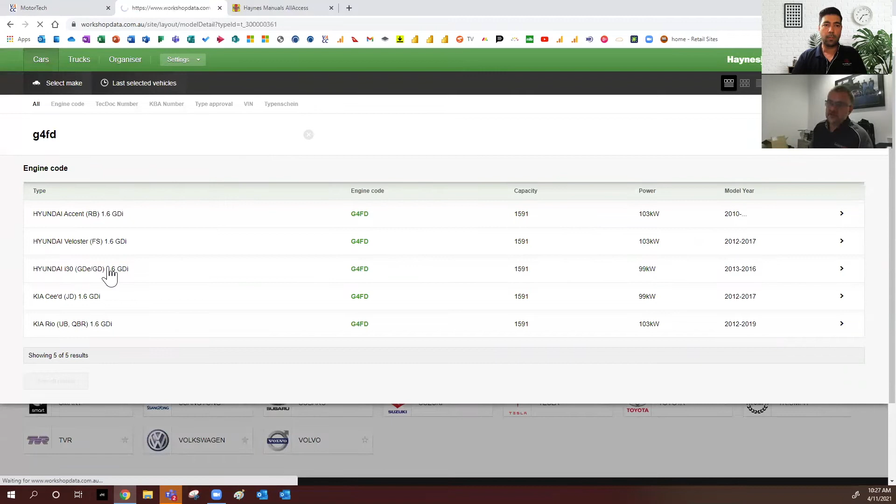I'm just going to pick on this car because this is my daughter's car. So if anything ever goes wrong with that, I know where to come now.

So this is a home page for all vehicles. Okay, so we can go straight into our service schedules or repair times, most common things, the fault codes. I'm going to come back to this. And then SmartPACK, as you were asking earlier, TSBs, recalls and cases—they're industry verified common faults.

So these are known. Haynes Pro has investigated them and verified them as well. Okay, so we can come into these. So as an example, we click here on the left-hand side, maintenance.

Let's just say, Peter, this is the very first time you're seeing an i30 come into your workshop, and you're about to do a service or repair, and you want to know what are some of the things I need to be aware of. So I can come in here and click on maintenance procedures.

I'm going to disconnect the battery or replace it, so I want to know what all my relearns are, or what precautions I need to take when disconnecting it and then reconnecting it.

Now, if it was a VW or an Audi with a steering angle sensor, it'd have that in there as well, where we'd have to just drive the car a hundred-odd meters dead straight, and it recalibrates itself.

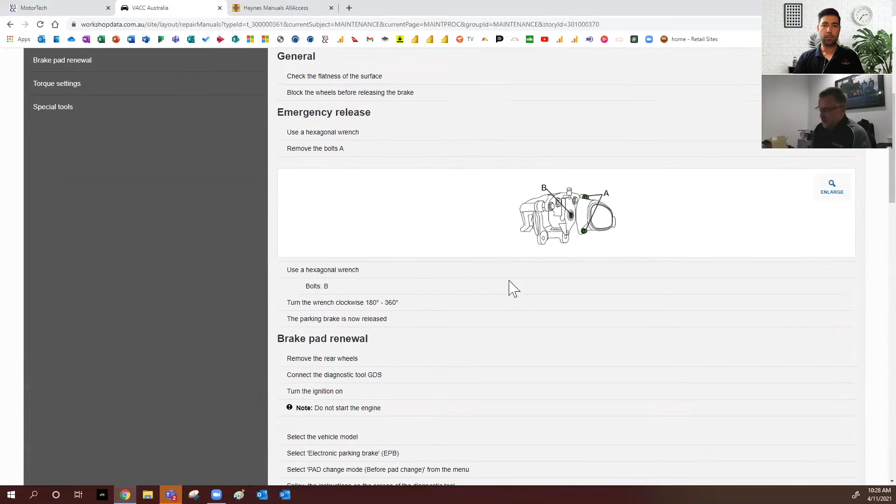Or it might have an electric handbrake emergency release, or how do I actually wind the pistons back in to do a pad change. Once again, all these diagrams expand, so it makes it nice and easy.

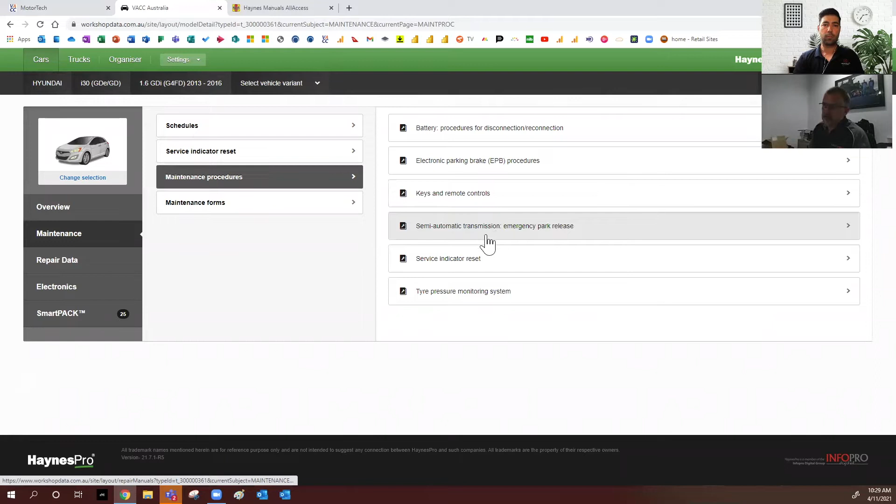So we might have then, depending on the vehicle, this list could have 10, 15 different things on there. It might be keys and remotes, or if it's stuck in park, service indicator resets, tyre pressure monitoring.

If it was a Mercedes that didn't have a dipstick, it'd tell you how to use the steering control to check your fluid levels. If it's a hybrid or stop-start, how to disconnect and reconnect those systems as well.

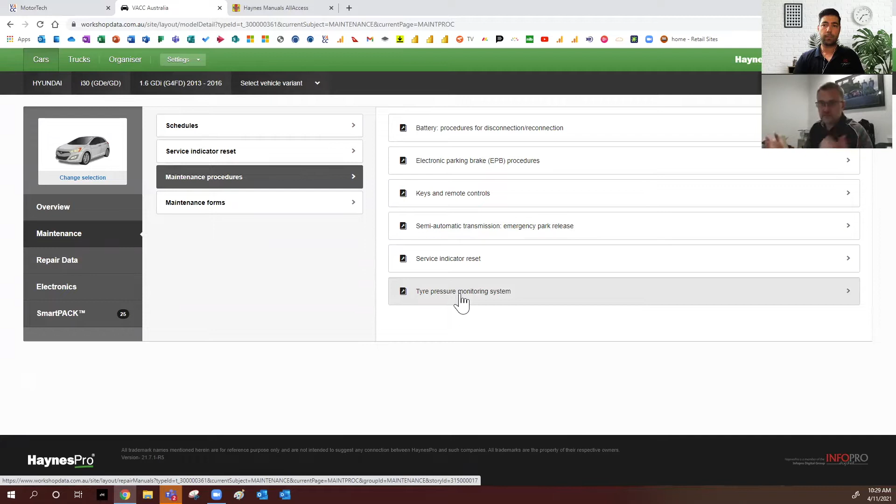If it had airbag suspension like a Disco or a Range Rover, how to disable those systems as well—so if you had it up on a two-post and you inadvertently hit the ignition, it wouldn't blow the bags up, that sort of thing. So once again, really good information in there.

Service schedules—service item intervals is just a real quick summary of when those consumables are due. So nice, easy reference: if your customer's on the phone saying my spark plugs are due, you can quickly look in here without having to go through all the different service schedules and say, no, they're not due at 120 or whatever it's due.

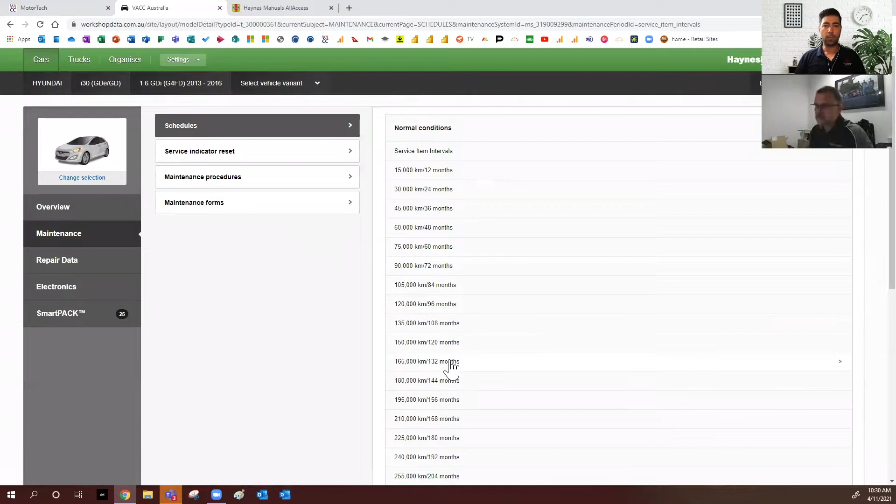But as an example, let's have a look at the 105,000 service. What it does is give me a standard time. Now, these standard times are based off OE times. Now, can we alter those times? Is there a variation so we can add a percentage to those times?

Yeah. I mean, we all know, and this has been a topic of discussion on the Garage Network, that sometimes they can be quite generous and other times quite skinny, and you might have an hour job that very well takes 2 or 3 hours, whatever the case may be, but you can adjust it.

Alter that in percentage wise. Fantastic. And this, as we get into it, it'll show you there's a couple of different ways we can do that.

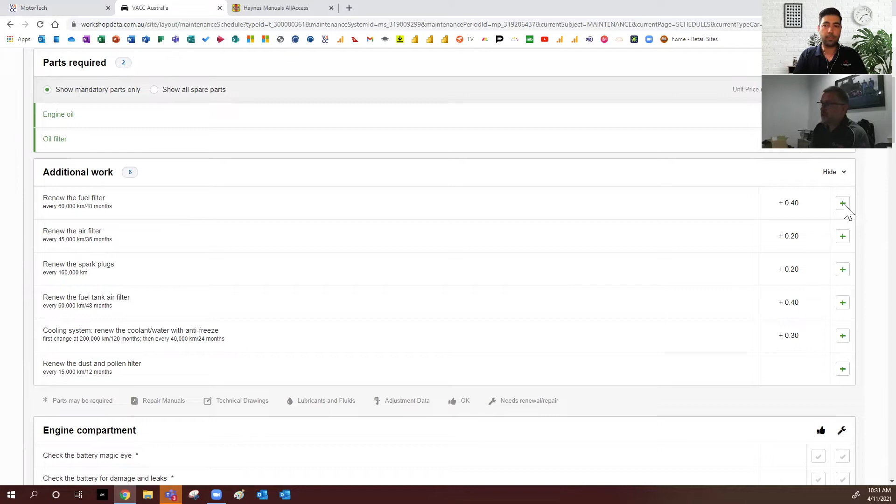So in here, what it does is at this point, parts required - so it's just oil filter at this point. But I've got a list of activities here that I might do because I look at the condition of the vehicle and say I need to go and do the fuel filter. So I can add that on, and it'll add the fuel filter into that list. If I scroll back up, it's now added that extra time and totaled it up.

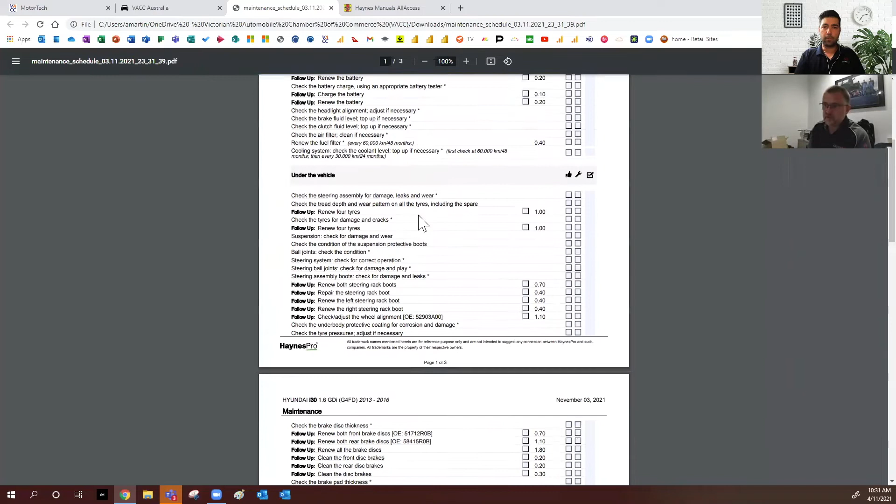So at this point here, just as an example, I can then click on print - I can do it as a job card or also as a customer quote if I wanted to. If I've got all the details in here and I hit print, what it does is it'll generate a PDF, whether I'm printing it or emailing it or whatever I need to do. So it's got that as well. Yeah, right, that's interesting.

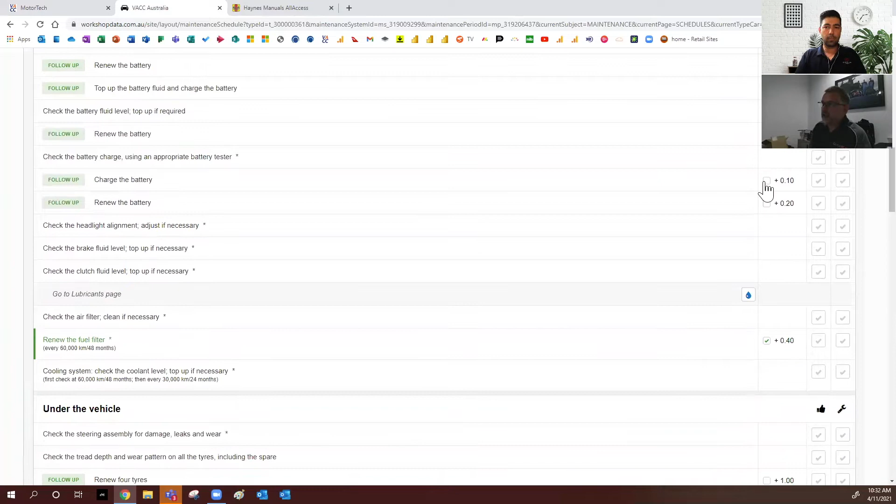Now then, as we keep going through the service, all the things we need to do - so from engine down, it's now got all of the service items that we need to do. We're clicking through, checking everything we've got to do, and we can click off here. But as an example, I can then go and add any of these items as well.

Click through - now, as you see, there's multiple little icons on the right-hand side. So if we clicked on that, it'll take us through the lubricants and fluids page. Depending on what transmission we have, it'll tell us what transmission fluid it is, our capacities, our drain and fill locations on there as well.

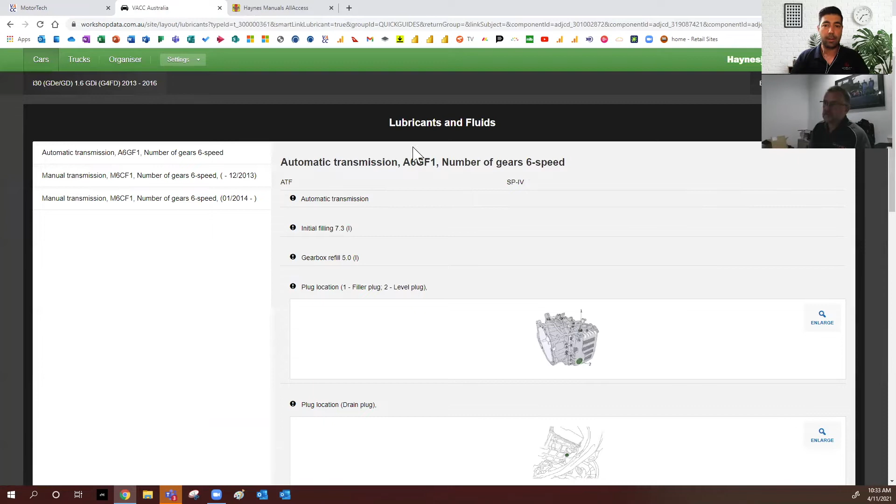Right, can we just go through that again, Andre, because I find that really interesting. So you've got the information at the ready - if I'm doing a drain and refill or a transmission service, because it's specified on that, I can simply click and it will show me the procedure for it. It'll give us the specs of the fluid there.

Fill and drain locations - it will then also give us, just in another section, the actual procedure, whether it's just a level check or we're actually doing a drain and refill there as well.

And then as we continue going through the service, whatever it may be, you'll also see here it'll say follow up - things to prompt us to go and have a look at. We might have been looking at the boots on the CV joint or whatever it is, but it might say follow up and replace them. So we can then click on that and add it, and it'll add it to our job card.

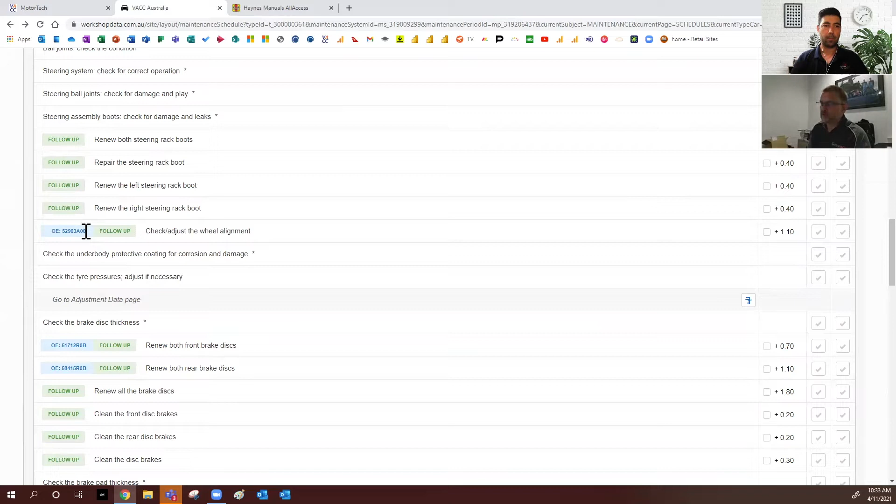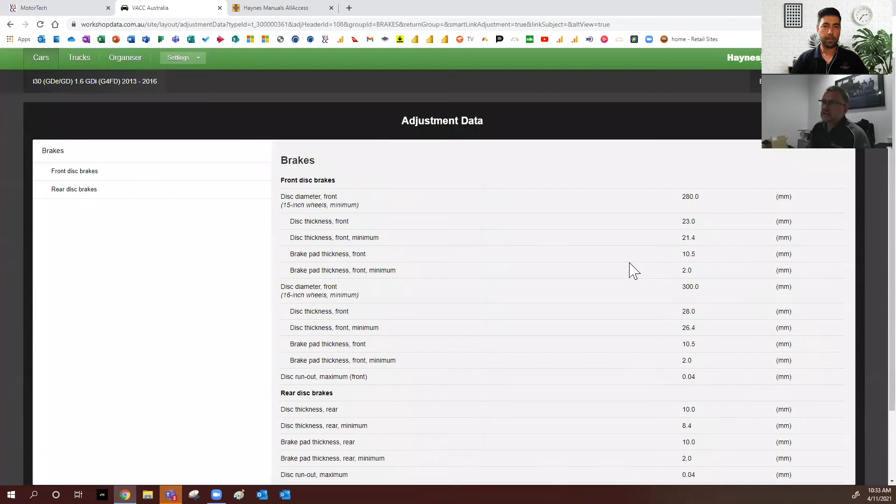So once again, we've got the icon of the verniers here. We click on that, it'll take us through to the adjustment data page of our various rim sizes, and give us our disc and rotor and pad thicknesses, or drum and linings and all that in there as well. It's nice and easy to navigate through when we're looking for that information.

Yeah, absolutely. And as we keep going through the service, we might be engine oils - click on that, link through to there. If there was pollen filters and or service resets, it'd have it in here as well. And it gives you fuel capacity. Just really quite simply there, straight up, that's good. And also then our sump plug torque in there as well, and same with the filter - a whole range of information that we'll need.

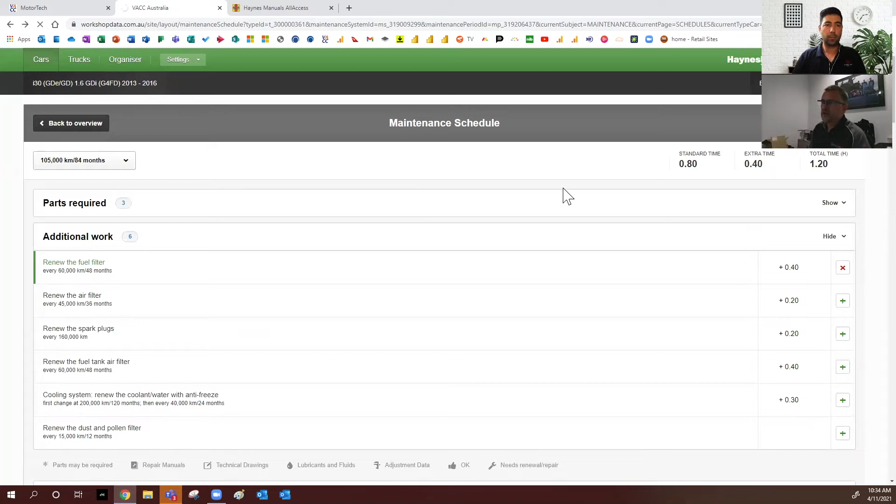And then obviously, as I said, it'll have the service indicator reset and the procedure there, step by step to do that.

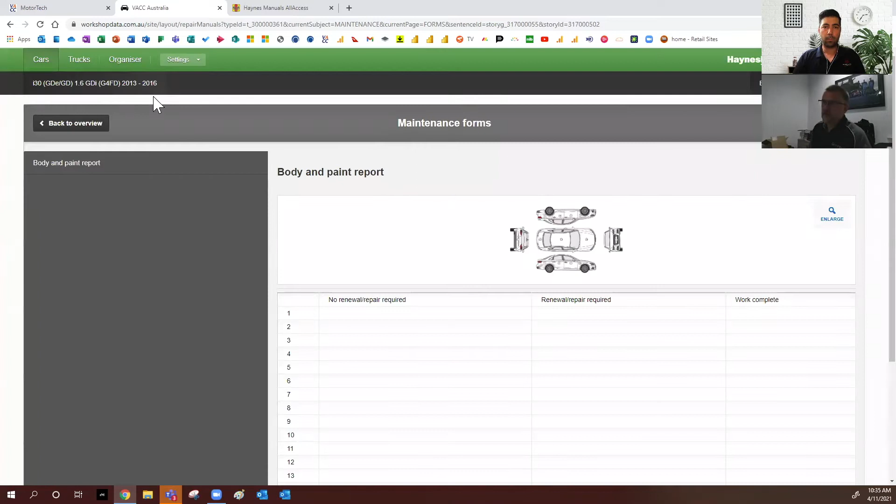Maintenance forms. We might be doing a vehicle inspection, and we just need to mark out any damages on the vehicle in there, or we might have other reports that we need to go and do as well. Nice and handy information.

When we get into repair data, this is the more mechanical aspect of things. We've got some filters, so if we just wanted to see engine, transmission, or steering and suspension info, we can click on that and it'll filter it down.

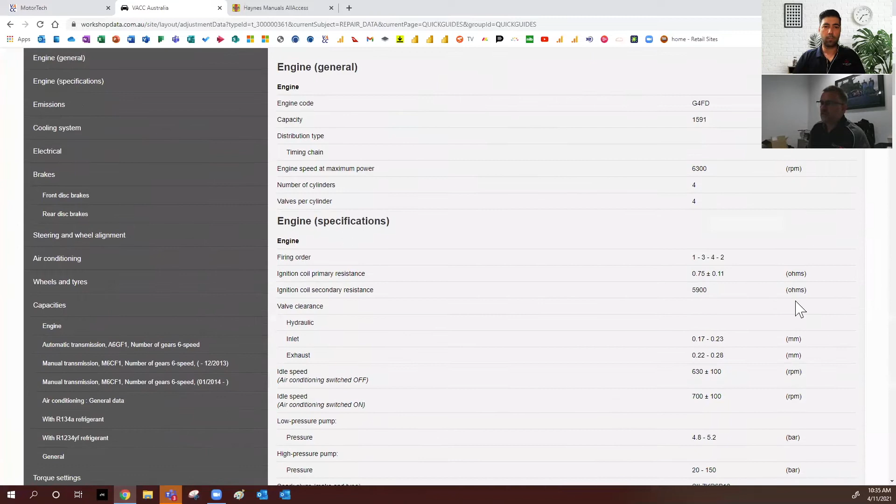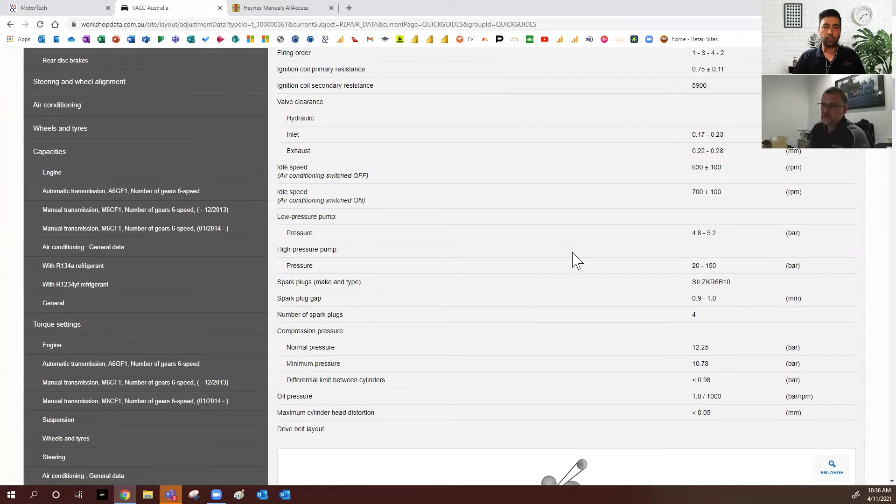Our adjustment data and lubricants and fluids is all that lube and tune based tech data we have. Depending on the vehicle, it might have things like our firing orders, our coil resistances, valve clearances if they're adjustable, fuel pressures, engine compressions, oil pressures, our drive belt layouts, and if there were multiple ones in there.

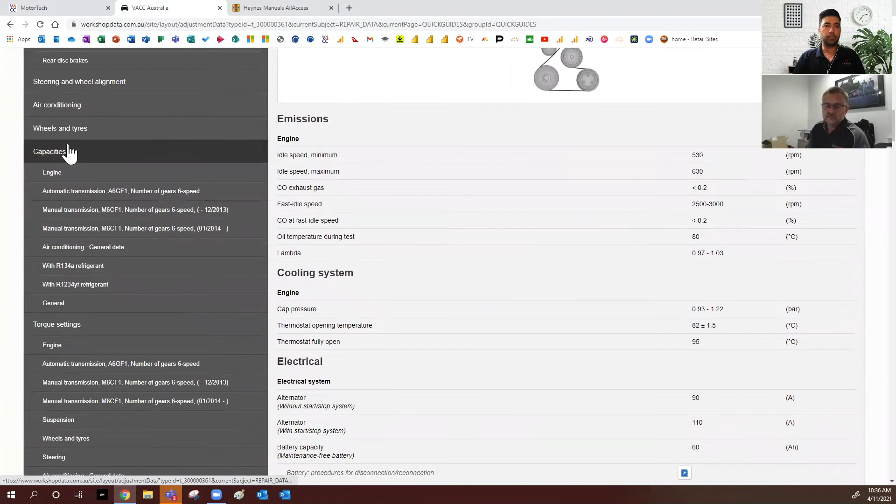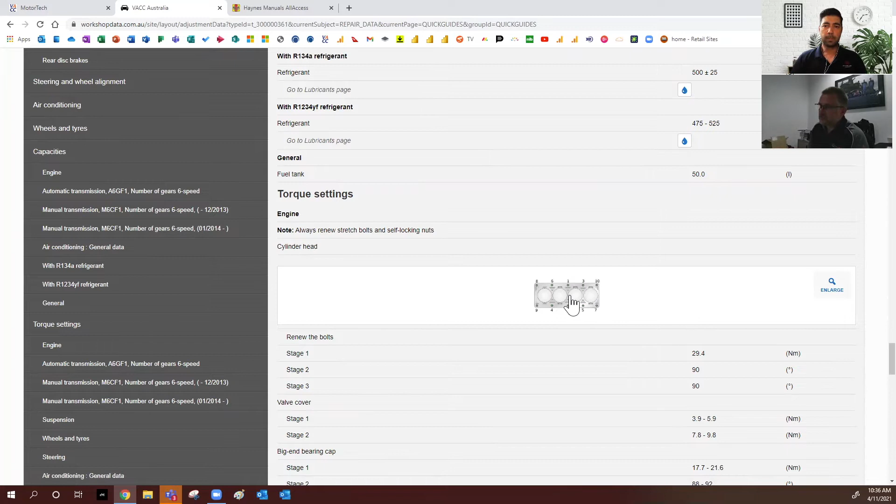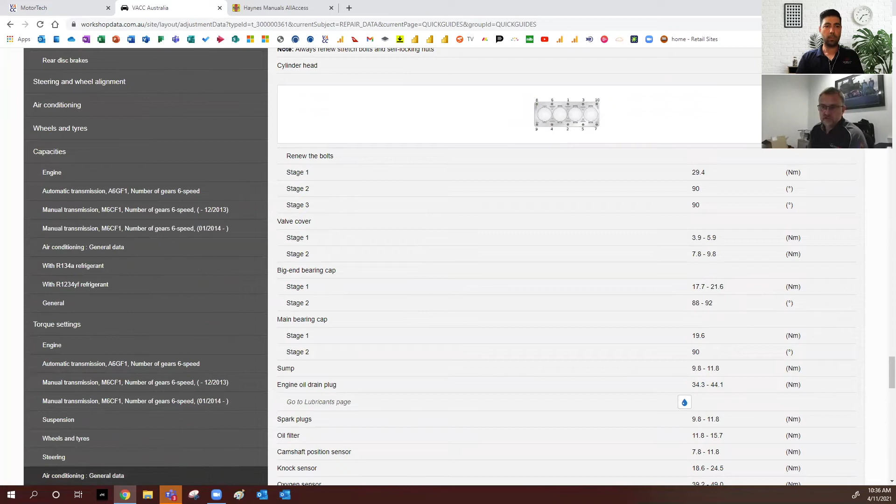As we continue down on the left-hand side, depending if the car's got air conditioning and what system it's got, it'll give us our gas capacities and also our oil types, with links taking us through to that particular page. Our torque settings throughout the engine, and our sequences, if there was a bottom end sequence, it'd have it in there as well. Sometimes general information about different systems in the vehicle too.

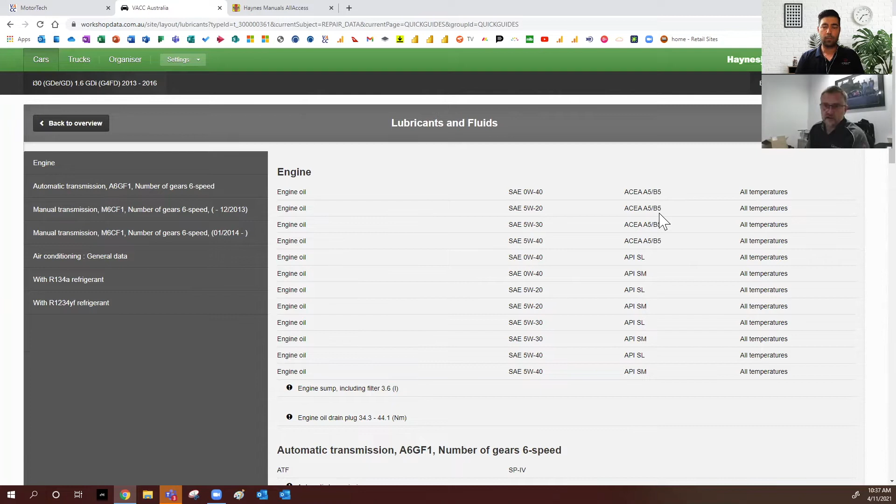Then we've got lubricants. It gives us a list of, depending on our conditions, the oil weights, and if it was a diesel, whether it had a DPF, it'll nominate what oils we have there. Our transmissions, our aircon, and depending on the vehicle, we might have transfer cases and all that in there as well.

So all the information's pretty much at the ready. The all-access section is more like the Haynes manuals, book form but now electronic form, and this actually has a little bit more information again.

So then we've also got our repair times in here, once again based off OE. We pick our system in here, so let's have a look at our engine, and then we can go and pick our subsystem. Let's say we're doing the timing chain on it.

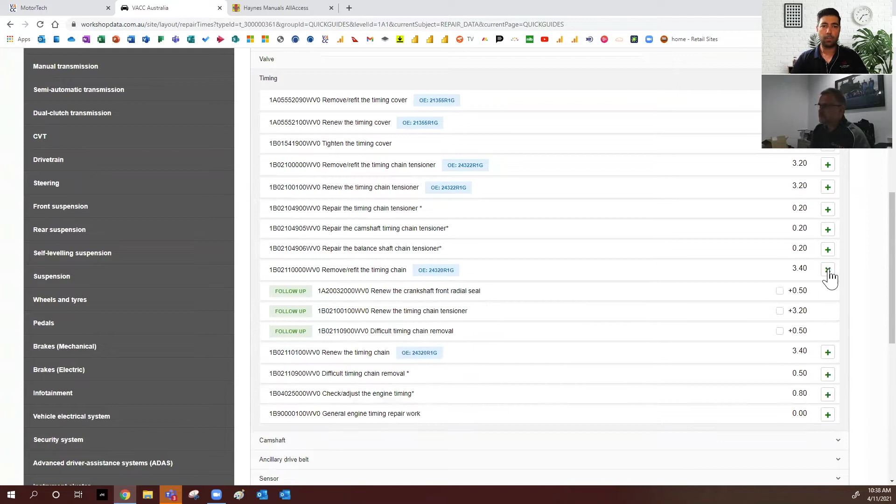Once we've got our factory times in here, if I came down here, I'm going to remove and refit the timing chain. It tells me what's included and some follow-ups on there - have a look at the front crank seal, maybe it was a V-dub engine, tell you to go and have a look at the water pump.

And things like that. Once you get here, difficult timing chain removal, so we can go and add half an hour to it. But when we print off or get to that point where we've got all our details in, we can manually go in and manipulate and add a 5%, 10% variation on the time, on each individual activity as well.

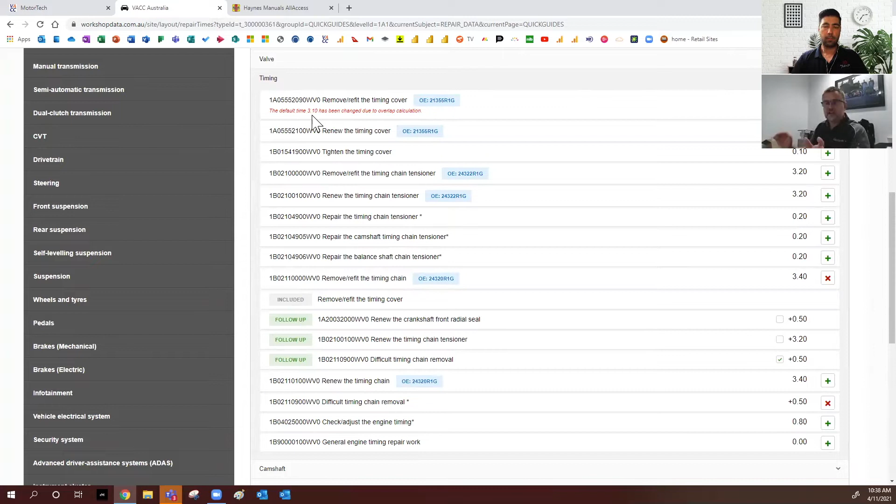So if I look at this and just pull the timing cover off without thinking, it comes up and says the default time has been changed because that's already included in this job here. So instead of just thinking 3 hours for this, 3.4 hours for that, it knows you're doing these jobs in the one process, so it amalgamates the time and gives you a more accurate time.

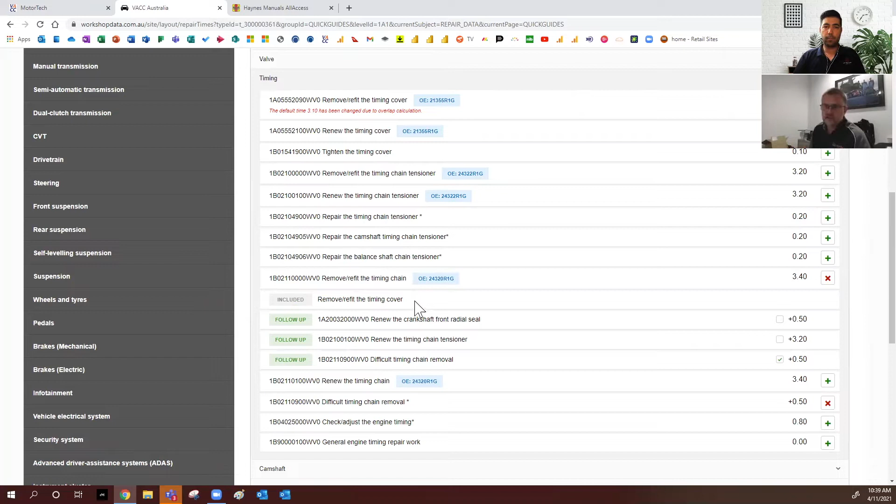So once again, building up that quote for the customer, it builds a nice accurate quote. Then as we get up to here, I can go and add it to my cost estimate.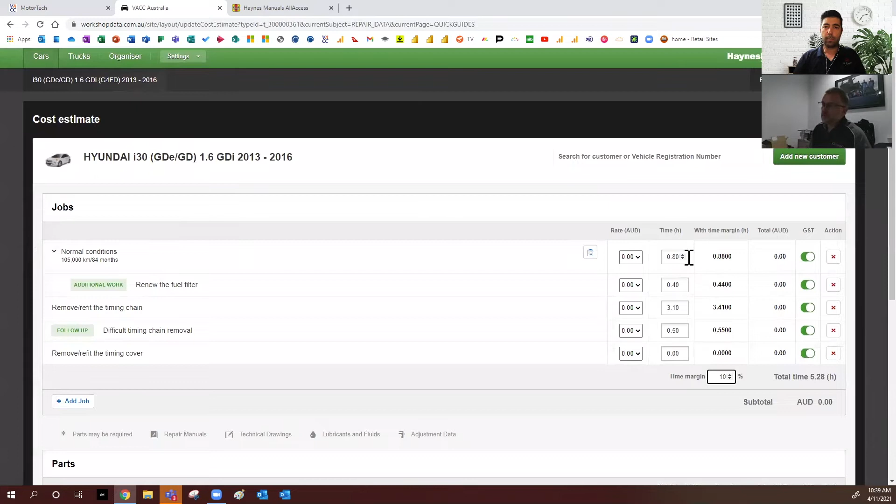Now this is where we can go in and add our margin, 10%, cool, we can add a margin to it as well. Previously we would have gone in and put in our labour rates too, so it would automatically start to calculate your pricing and your parts and all that. And we can save it or email it to the customer. Yeah, that's really good.

Yeah, see, I can see where you can change your rate there as well.

So when we come back into our main page, once again, this list of activities changes depending on the vehicle. But we might have had auto trans, so in here it'll give us our level check procedure step by step, and then also our drain and fill procedure in here as well. Then all the diagrams expand and make it easier to see. But now it gives us our torque settings on there, and any special tools we may need as well to do that.

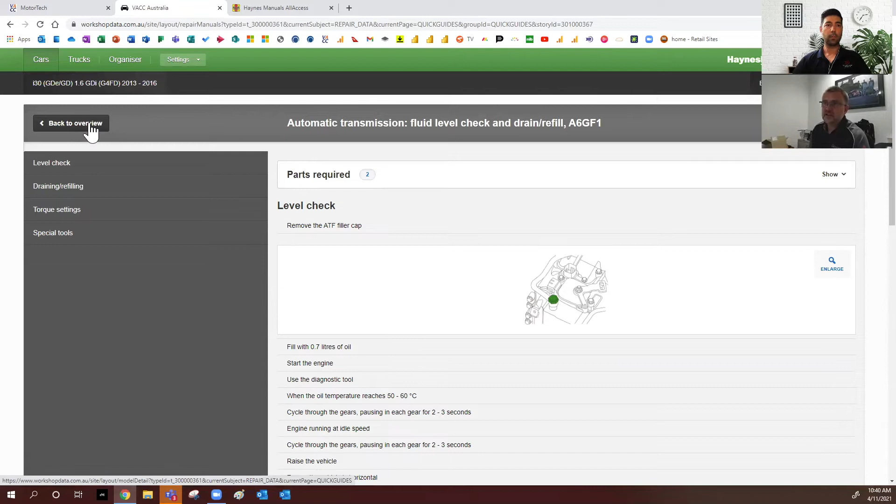And you've got the quick index on here, so we just want to go straight down to find the torque settings, we can come in on there. So navigation is really easy. It's like anything, it's just learning a new tool, be it a new scan tool or a new phone. You just got to take a little bit of time to learn the navigation.

And with that, I'll come back to this, is that we do offer online training. We have multiple training sessions. At the moment they are weekly, and you can join any and all of them, and come in and just learn to get the most out of Motortech, learning how to use it as quickly and efficiently as possible, and asking questions. And so we're here to help.

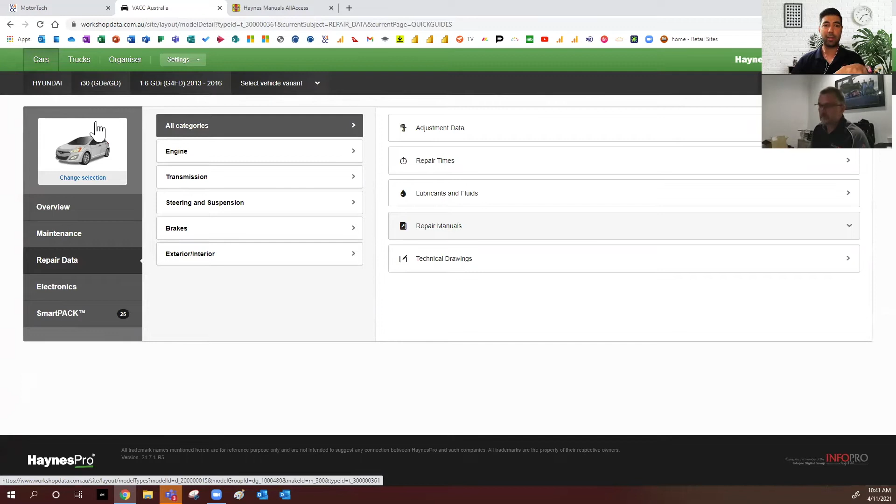But you've also got the tech line, don't you? So if I'm on this and I get stuck as to where I need to go, I can just pick up the phone and ring you guys, and you can sort of run me through that as well.

Okay, cool. So we do the technical product support. So if you're not installing, because this is a website, it's just a favorite on your browser. But if you've got it running on a desktop, and then you've gone and bought a new tablet, and you can't get it to work on that - if it's an Android-based one, usually pretty easy, and depending on what browser you use, sometimes it's a matter of changing some settings in there to allow pop-ups. Okay, cool, so quite easy. We help you with that.

But also, you may be looking at that particular vehicle, needing some information, and we've looked at whatever we need, and you go, okay, I've got to that point, but there's something different about this vehicle, or there's something else that I need, because no one online system has everything. And that's why you've got that resource of that library where you can call in and say, hey, I need some more information about pulling this transmission apart, to strip it down. You're not going to find that online. But we can give you, depending on the vehicle and the transmission, we can break that down and send you out exploded views, procedures, or whatever it is to strip and rebuild that transmission.

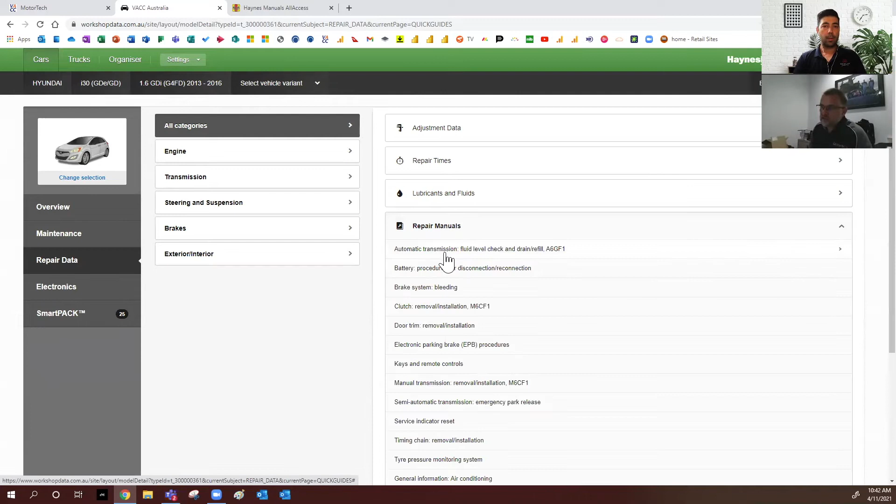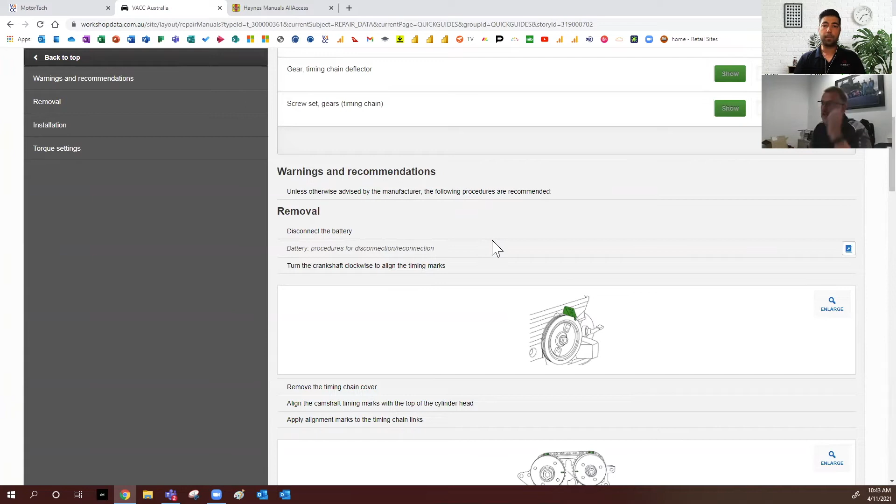So, depending on the vehicle, we might have had clutch and or gearbox removals, door trims, the timing chains on this. So what it does here, parts required - that might be the chain, the guide, the tensioner, whatever else, might be a kit in there. If there's any warnings and recommendations about it in here, you might have things like, if it's a VW engine, replace the water pump while we're in there. And as you can see, step-by-step removal.

And so we can come in here and see our timing marks and chains. As I was saying before, some guys will interpret this type of information, but other guys it doesn't quite make sense to them. They prefer to go and have a look under a Haynes manual, and then they can see the pictures, have a real photograph of that system.

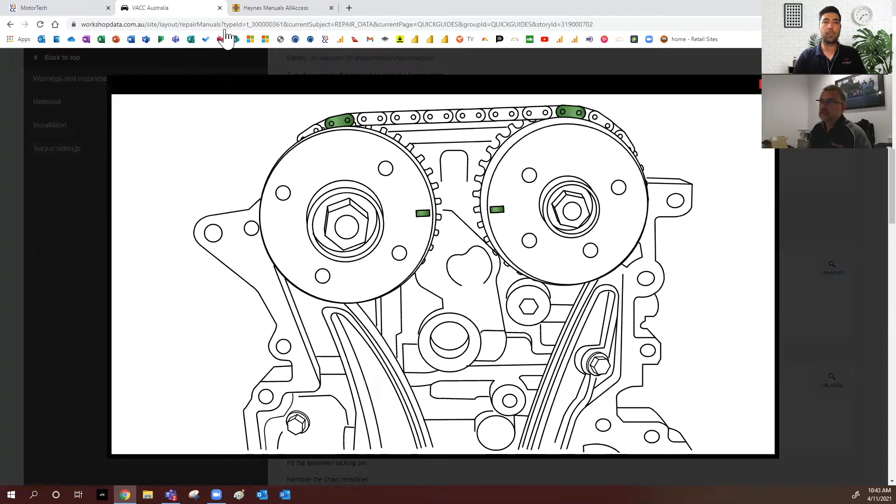So as I said, multiple ways to find that information out, and then step-by-step installation on it as well, and then all our torque settings in there as well. Now if there was any specific tools in here, it'd note it down here as well, including their part numbers. So if you needed to hire or buy them or source them, you know exactly what you're looking for as well.

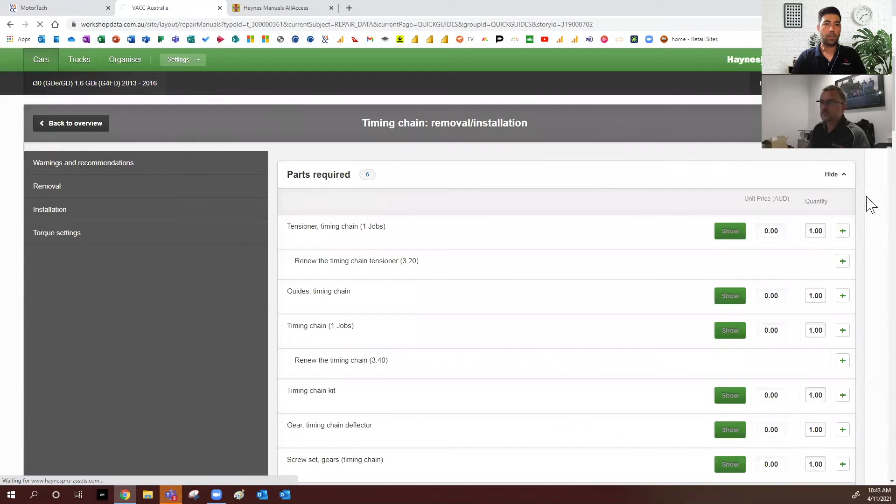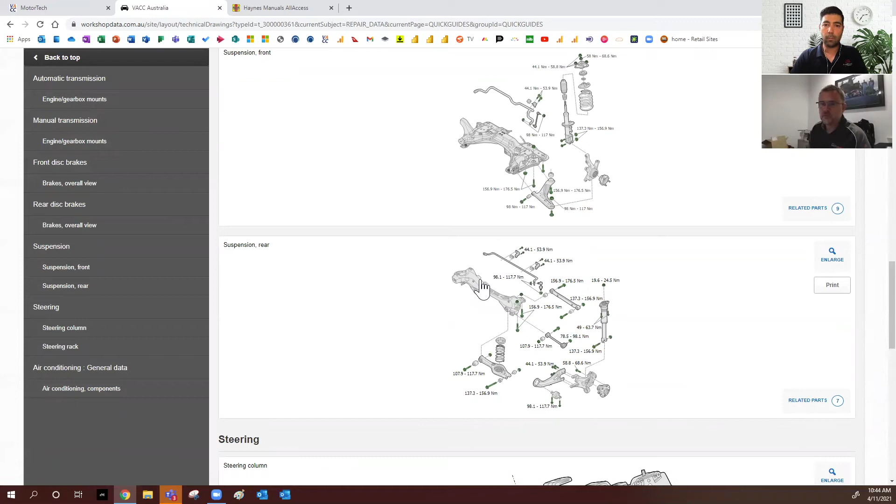And also, trying to pull that component out of the car, where's that one bolt that's holding it still in there that we can't see? So I think those exploded views are really good actually. We often get them sent from parts departments, just to get a visual, because sometimes you can't quite get the visual, but it's good that it's all on here.

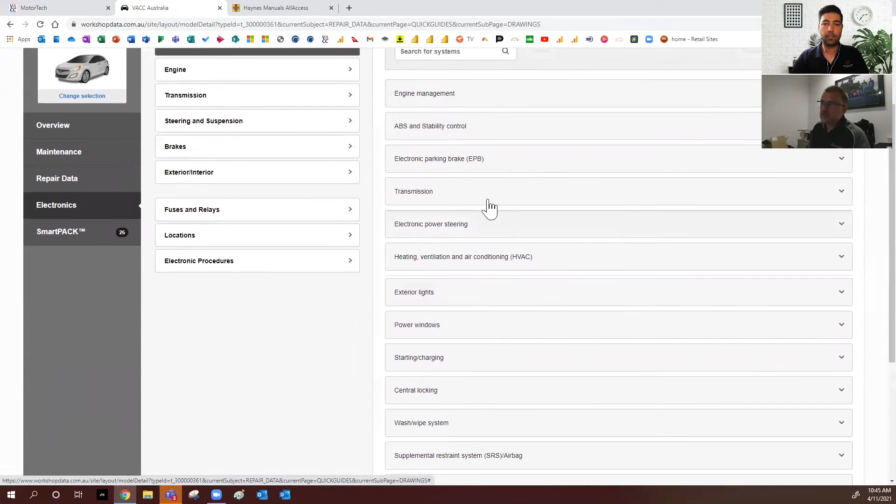Yeah, so electronics. Depending on the vehicle, the number of wiring diagrams that it supports as well. So some of them will have a handful, and some of them will have 20, 30 different ones, and then all the variables in there as well.

Okay, but we can also come straight into needing to know where the fuse box and relay box locations are within the vehicle, and then also wanting a layout in here as well. So it tells me where that fuse box is, gives me a layout, and if, as an example, I was looking for that particular fuse, it then goes and highlights it. And also notes what amperage that fuse should be.

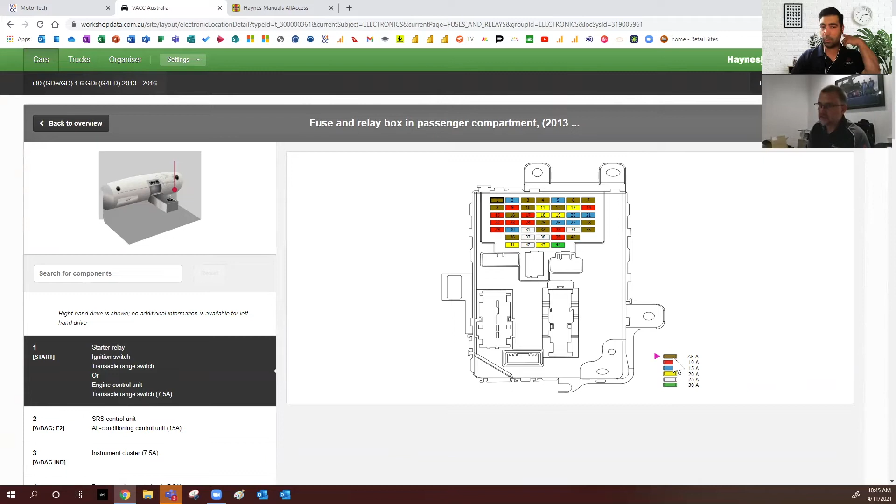Okay, that's awesome. So I might be looking for other components within the vehicle, again depending on it, where a diagnostic connector is, control units, and I'll show you how that actually works when we get into the guided diagnostics component or flow chart. So you don't need to identify a diagram before you go look at the fuses.

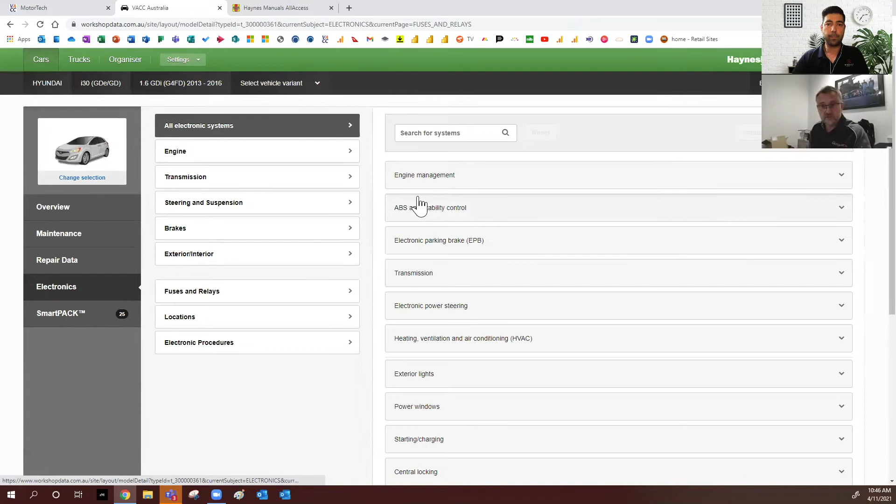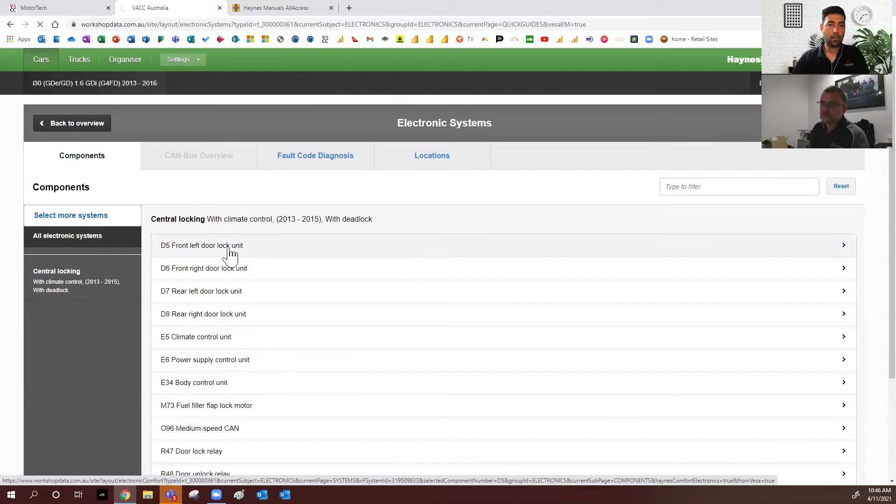But as an example, let's just go and have a look at central locking. So there's a number of different variations. Let's just pick this first one here. So what it does now is it gives me a list of all the components in that circuit. Okay, and I'm going to say the front left door lock unit. It will give me an expanded view of the entire circuit in there.

Now, as you can see, we've got the wires in colours. So sometimes I'll just change that back to all black or monochrome, sometimes it makes it a little bit easier to see. And I'll just scroll in a little bit.

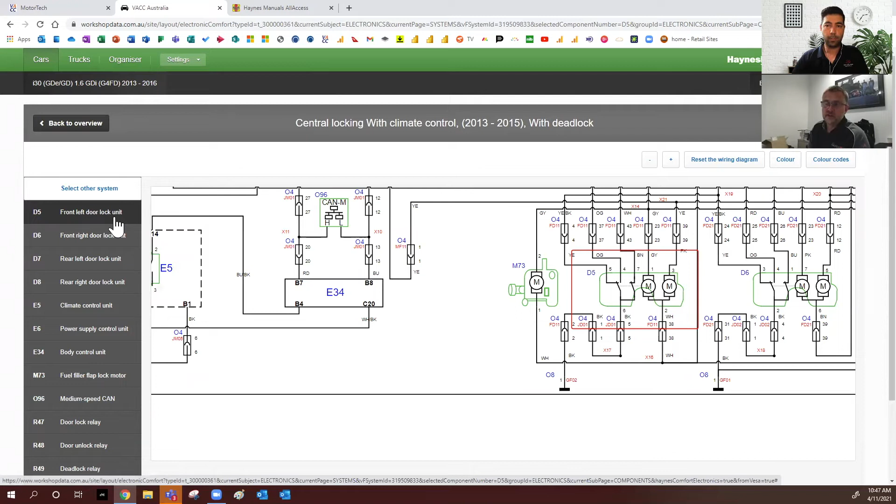You'll now see this red highlighter around D5, which is our front left door lock unit. I'm looking for the front right one, click on that, it takes me over to there. So it's interactive. Or I might be going, what's this component here? Highlighted, and it'll then move us over here in our index, so we know exactly what part we're looking at.

Now, as I scroll into it, you'll see we've got our wire colors, we've got our pin numbers in there as well. We've also got GF04, GF01, which are our earth component locations.

So once we know what component we're looking for, we can come back into this prior screen and look at locations. And if I was looking for that particular fuse, I can go and look in that fuse box. I'm looking for, in this case, the BCM. I can scroll down, go find the BCM, and it highlights where it is in the vehicle with that, not so much the part number, but its identifying number E34.

I was also looking for my ground points, and it does have a right-hand drive update on a link. They've done an update, and once again they do updates regularly on this. We have big quarterly updates. The last update, I think, had about 8,500 articles updated, including new vehicles in there as well. And sometimes you'll just see, you might be on a car today and they've made a minor change overnight, so they can do that sort of stuff as well.

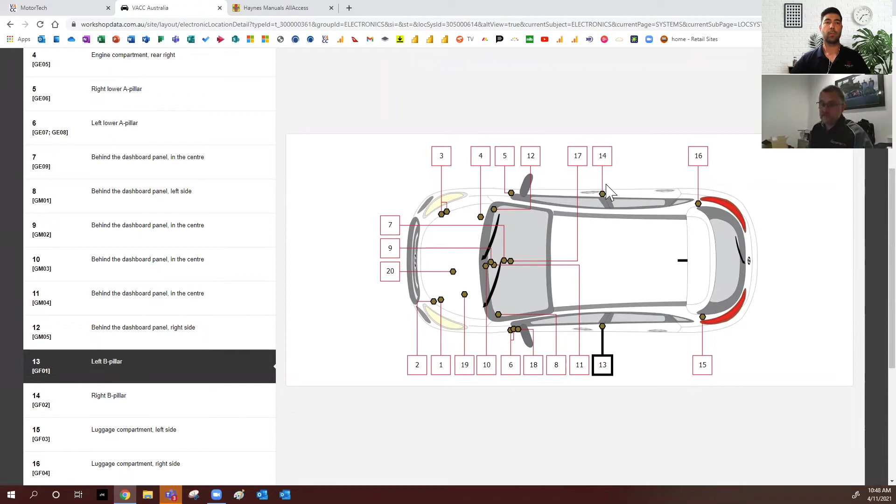Yeah, oh sorry, and not to disparage the mechanics out there as well. So but if we're looking at electrical problems, that's what we're after. Absolutely, yeah. But it's much more commonplace now, isn't it? And you definitely need this info.

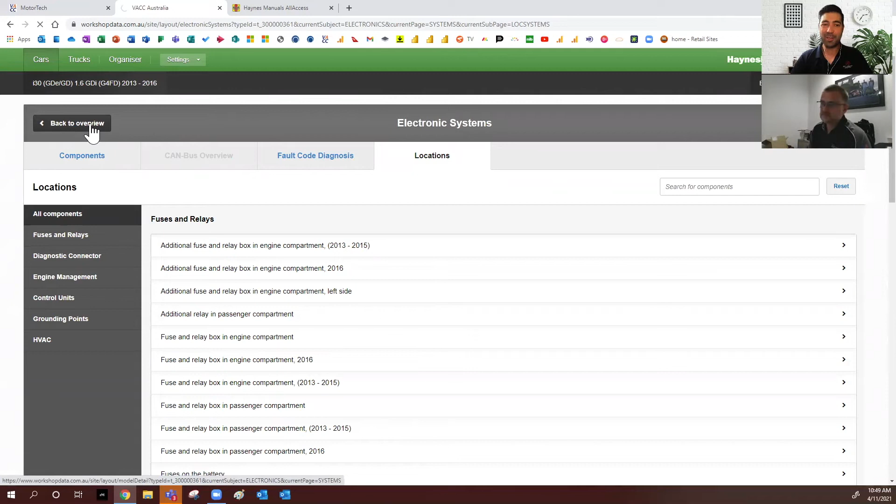Countless times you're looking for a control module, and it's ideal to have this info to know where it is. Otherwise, you're pulling trims apart and all sorts of stuff just to try to find it. Yeah, it's such a waste of time doing that.

Okay, SmartPACK. This is that online library of industry verified common faults, recalls, and TSBs, and it's always getting updated. This is what I'm interested in, because we had a particular instance where there was a complaint from a customer about their wipers intermittently working. We looked into it, found a TSB, and it had exactly the symptoms, and it turned out to be the case. So it was very good that we have access to that.

So in this case here, we've only got 25 articles. Now if we were looking at a European vehicle - not pointing fingers at the French, German, or Italian ones - there'd be 400. Exactly. So we've got a range of filters up here.

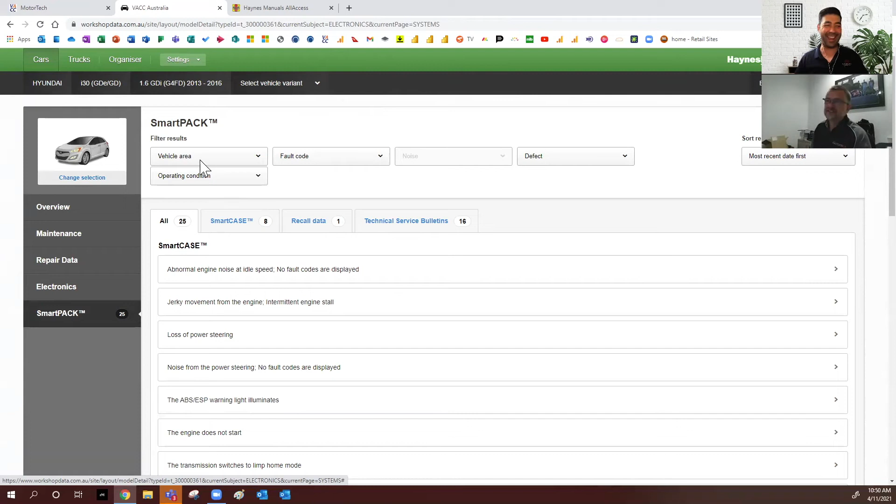I'm looking for something to do with steering and suspension. Now it's whittled it down to 5. So it might be a TSB, noise from the power steering. Click on that. Now everything is basically symptom, cause, solution.

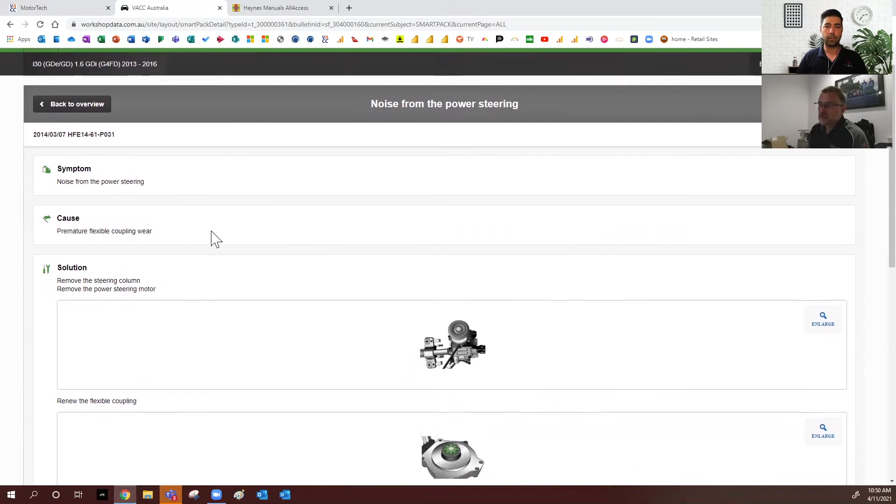Many of us, probably most of us, will know this on the Hyundais and Kias - the little flexible coupling at the end of the steering column into the motor wears out and needs to be replaced. Sometimes it'll give us part numbers, and sometimes it'll give us a time as well. So now that we know what it is, customers complained about the noise when they're steering.

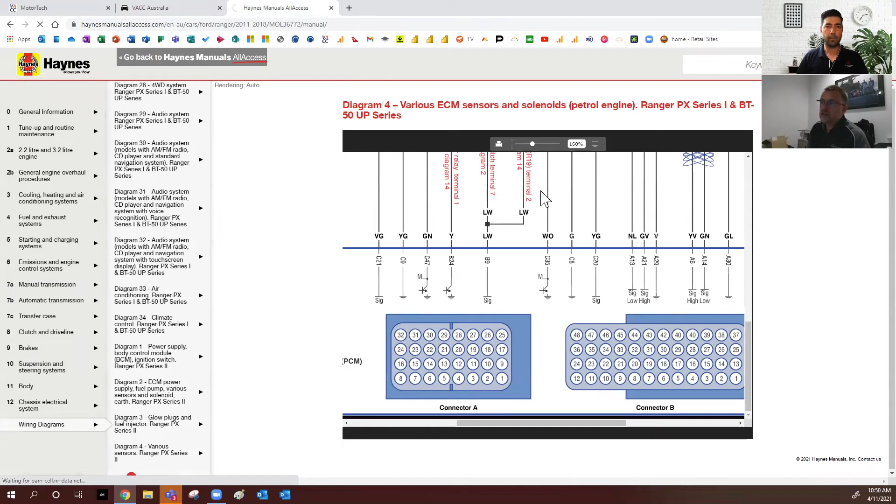We can then go in here, go back, find the Hyundai, find the Kia, and go through and get the nice colour photo to remove it. But as an example, I also know that we had an article in this. So this is using our toolbox.

So i30, and once again, all the different series, all the different chapters, and the number of articles we have for the i30. There's a Tech Talk article. I can come in here - power steering column noise - it tells me what other vehicles it may have affected, a little bit more information, and then I can click on the actual PDF article we've done for it here.

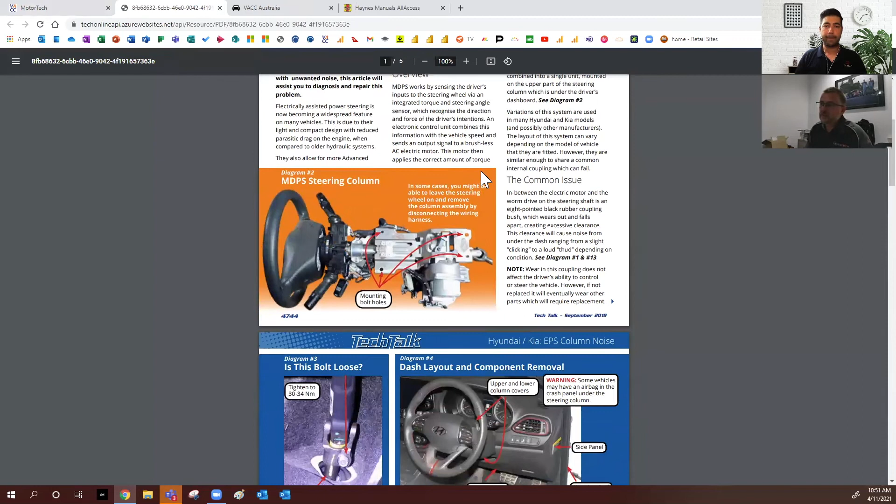That's awesome - step by step, what the problem is, removing and refitting the steering column, pulling the motor off the shaft and replacing that component.

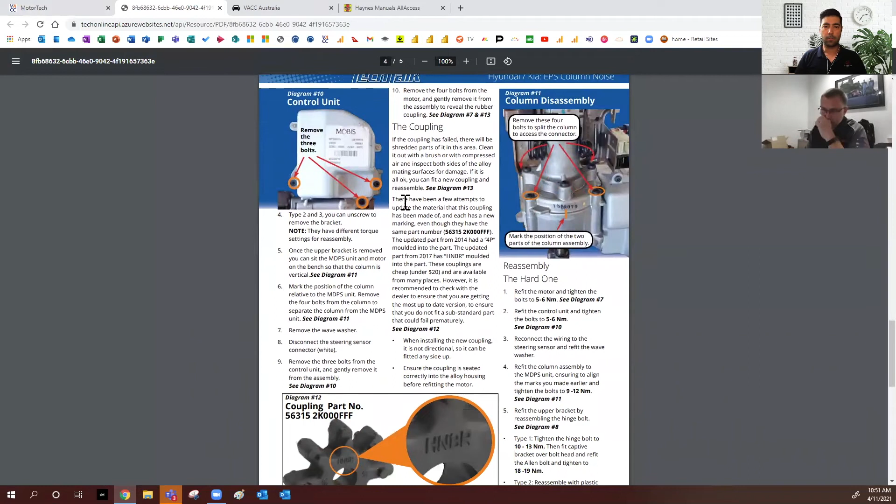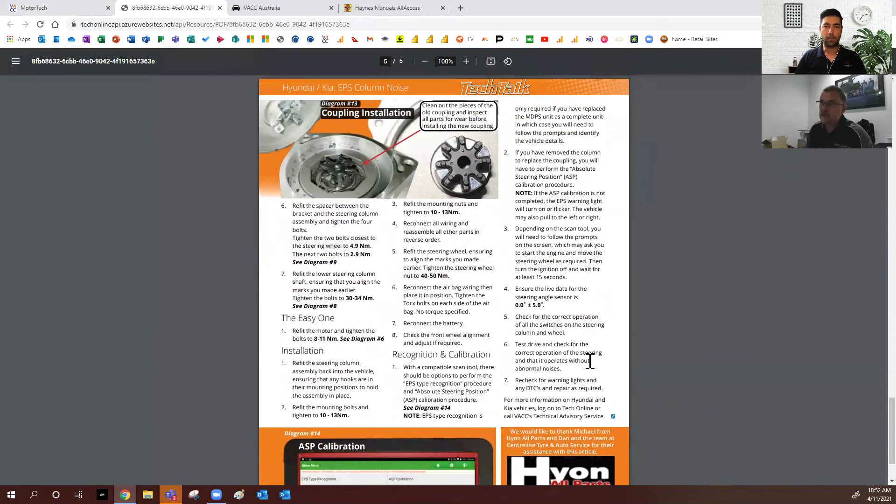So I definitely think those TSBs are a must now, and that's become part and parcel of our diagnostic pathway. We'll inspect symptom, scan vehicle, check TSBs, in that order, and then moving forward from there we try to diagnose. I definitely think that's got to be part and parcel of your diagnostic pathways.

And within this as well, depending on the process you're doing, it might tell you to replace a particular component, and it won't just stop there. It might tell you that, depending on the situation, you need to update the software, or you have to install and do a handshake on the vehicle so it knows it's got a new component in it. So it doesn't just tell you to install it - there are some other steps that you need to do.

Whether your diagnostic tool has pass-through technology on it and it can do that, and you have access to that software, or you may need to go to a dealership or a third-party supplier who can do that for you - at least it's telling you those steps that you need to do.

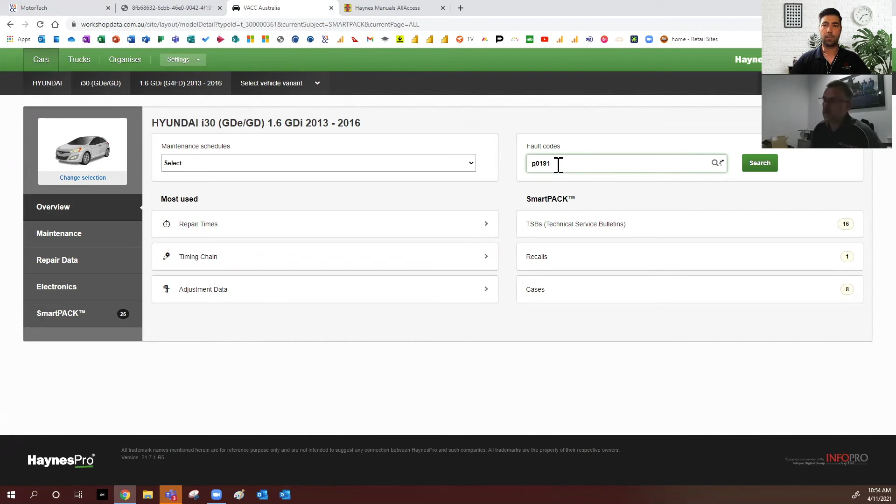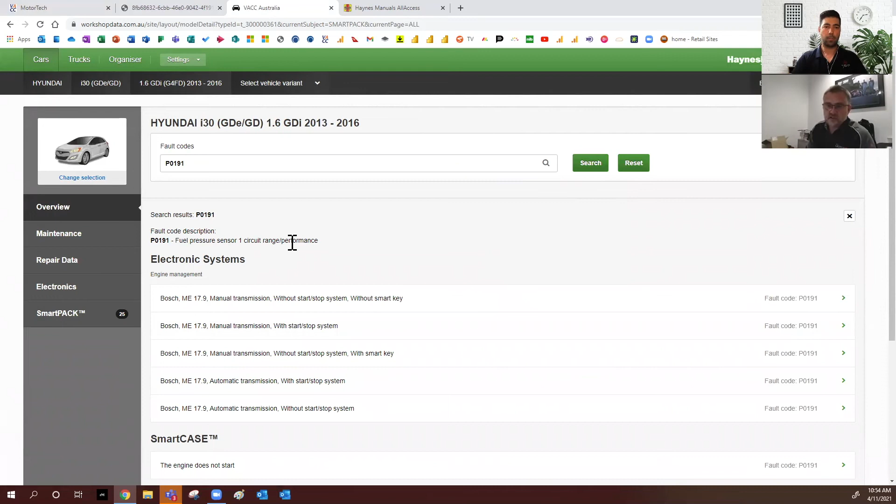Okay, enter it in here. It goes and interrogates its system and says, okay, we have maybe two variations - maybe there's a C code or a B code in there. If it was a BMW we'd have 4, 5, and 6-digit code numbers, we'd have a list in here as well. But in this case, we know it's our fuel pressure. So give me a brief description of what the code is, and ask me to better identify the vehicle - maybe what management system it's got, auto, manual, start-stop, all that sort of stuff in there.

It automatically went and interrogated its SmartPACK, and there happened to be an industry-verified common fault, a SmartCASE, about that fault code on this particular car. We might have had multiple ones in there, there might have been recalls, there might have been TSBs on it as well. So let's click on to understand what this SmartCASE is.

So once again, symptom, cause, solution. It tells us we might have had a couple other fault codes in there, but it talks about the pickup pump in the tank. And solution: through our diagnostic tool, can we activate the pump? Do we see 4.6 to 5 bar fuel pressure, or have we got a pressure gauge on? That gives us a direction as to what our next step is in our diagnosis. But we know there's a common fault with the fuel pumps on there.

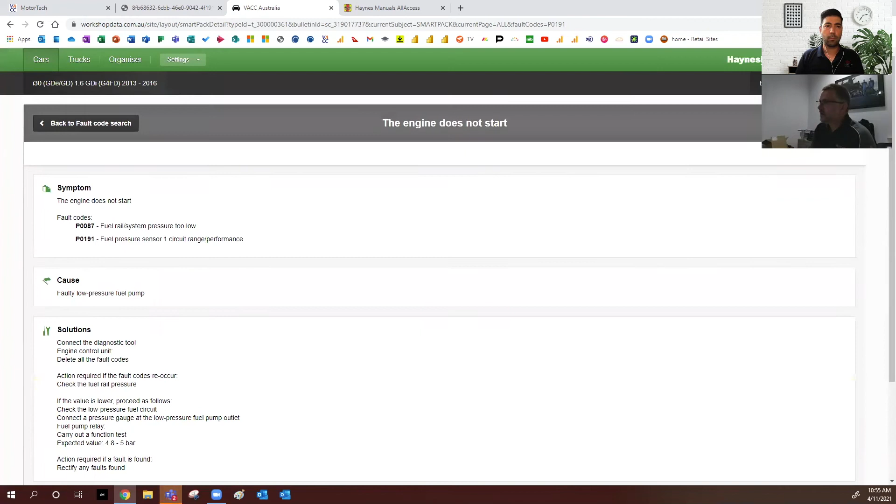So we just go back up to the top here. Sorry, I'm on someone else's computer, so their mouse is a little bit different for me. Now we can go back here into the testing as well. So, fuel pressure sensor, okay.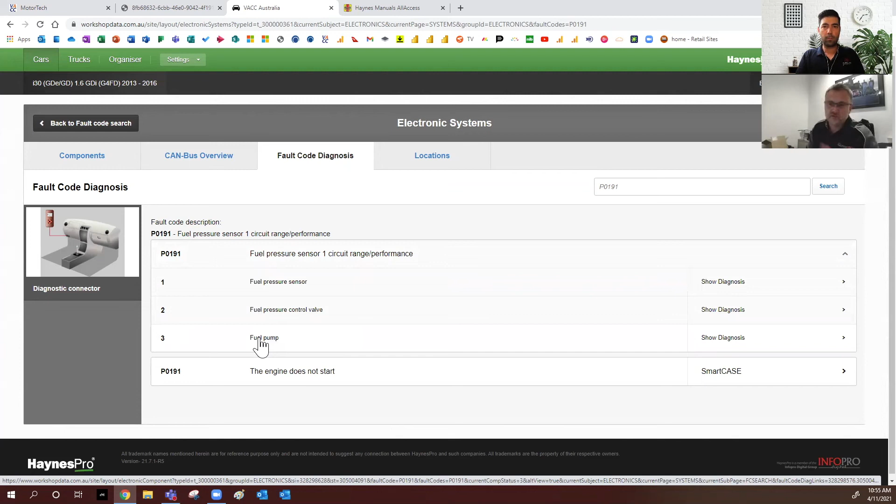Depending on what came out of testing the fuel pump or the pressure there, we could have gone to the fuel pressure sensor, the control valve, or in this case we've got no fuel pressure at all. We've tried activating the pump, doesn't work. So we click on this.

So now what it does is give me a diagram of the fuel pump relay, the main relay, all the other wires in there as well. Down below I've got my wires in there. Now, depending on the component, we might have some component info, we might have some testing, we might have some graphs of - if there's a coolant temp sensor - temp versus resistance in there as well. We might have scope traces. It just depends on that component.

But I can also have a look here, and this is a new addition to it - extended wiring diagrams. So I can go in and now see a global diagram of that wiring circuit for the engine management. It still keeps highlighting the fuel pump, but I've got to scroll in to actually see what I'm after. And one of the good things about here as well is if I'm looking at that particular wire, it's actually showing me where it goes.

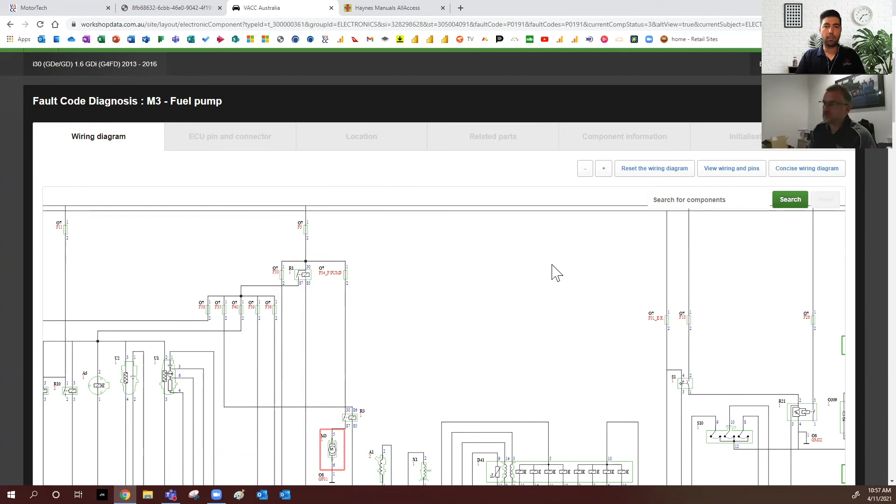Yep, so I can see, as an example, if I've got a short circuit, I can see that fuse, where else it feeds off to as well. So it's not just isolating back to that concise one - I get to see the bigger picture, which is really important in diagnosing a short circuit there.

But so what it does, first step: have I got 13.2 volts to pin 5 of the fuel pump? Yes or no? So now it says, start or crank the engine. Do I have 13 volts to 87 of the output of the fuel pump relay?

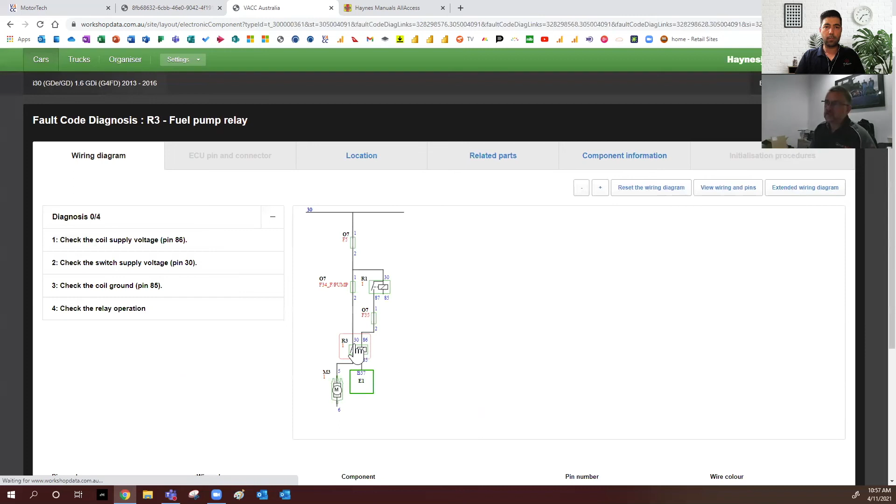Well, at this point I don't know where the fuel pump relay is, so I can click on the green text or on the actual fuel pump relay. It now will take me to a diagram specifically of the fuel pump relay, but I'm also looking for its location. Okay, it's in that fuse box, and there it is there, relay 1. That's awesome, so now I know where I'm at.

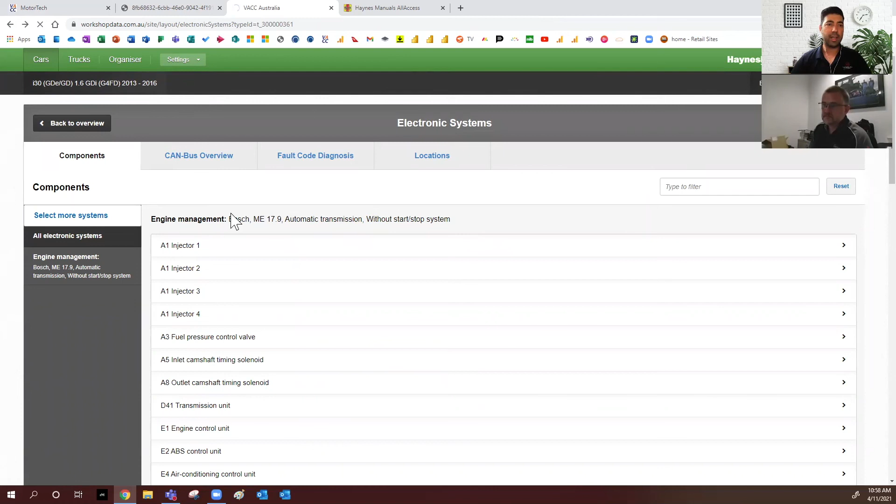And this is all that guided component testing, so it sort of gives you a step by step, so you can run through that quite simply. So here we've gone and said no, we didn't have power at the pump. We found the relay. Now, if I turn around and say that I do have power at the relay...

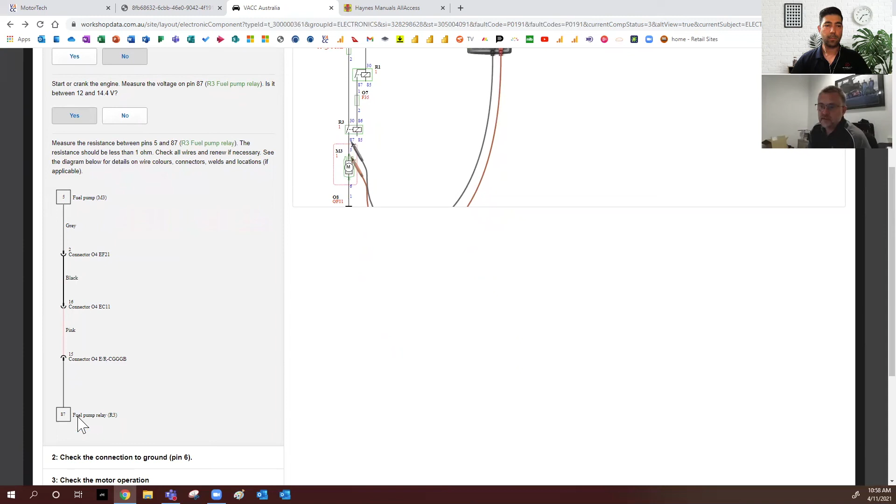It then says that I've got a broken wire or an open circuit between the pump and the relay. It tells me it goes through a number of connections and might change colours as well. But had I said no, it doesn't - I still don't have power coming out of the relay - I need to then go and have a look at the fuel pump relay.

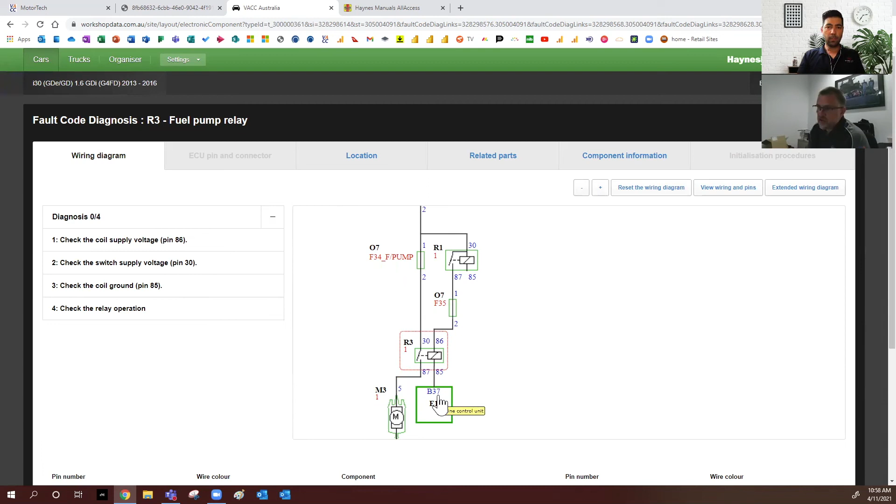We're on that page we were before, and I can go through all these steps here. We have 86, we've got 30, but I can see 85 is switched earth out of the ECU on pin B37. Yep, I can just click on that.

It now gives me a wiring diagram of the ECU, its other main components, relays and all that in there. Once again, I can click on the extended diagram, and I could, if I needed to, go through any of those tests. But once again, I want to know where it is.

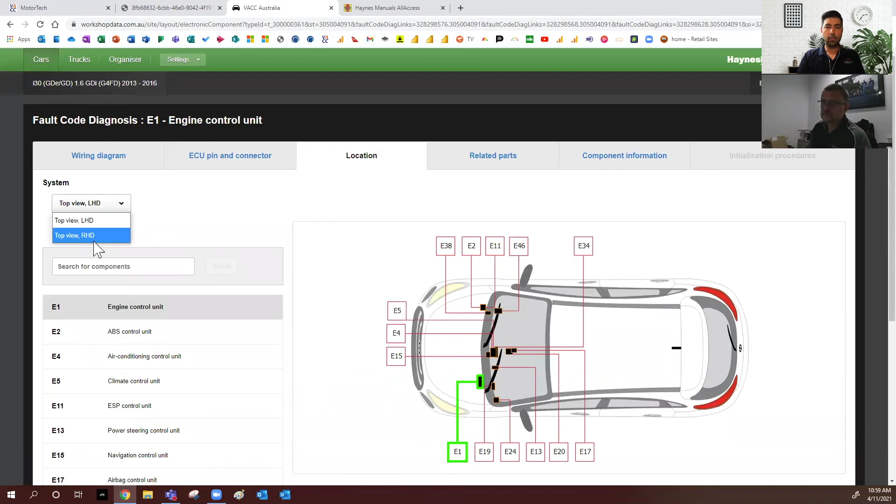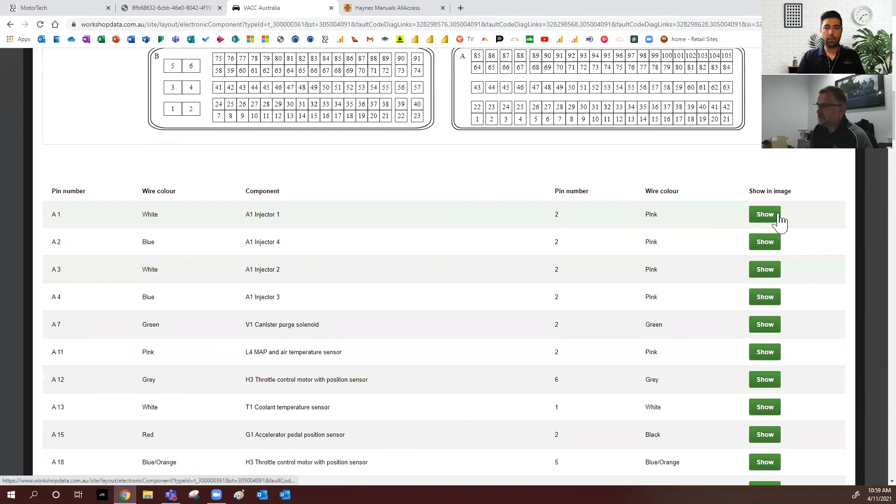Takes me through to where it is on the car, but I was also looking for pin B37 now. So I can scroll down here, and just for simplicity, we'll make that there. So it's showing me where it is, both on the plug and on the unit. So now I've got the component, the fuse, the relay, the module, the wires between.

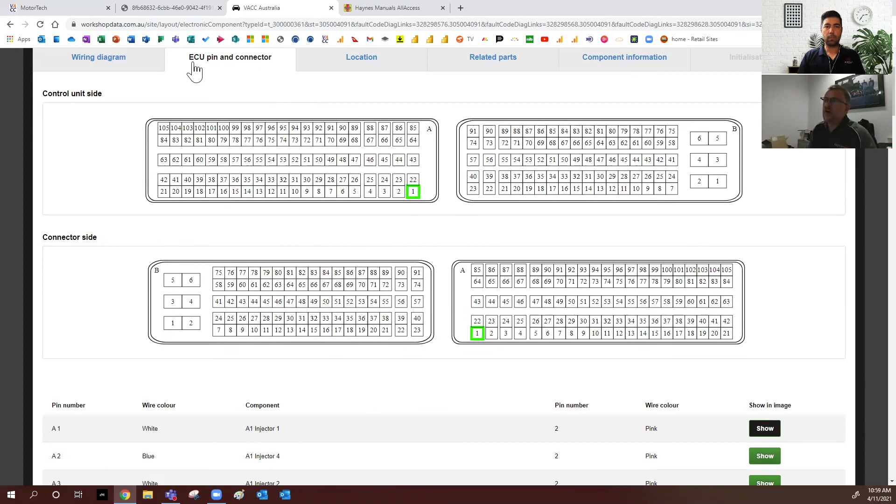So as an example, I'm now going to bridge earth into that circuit. Relay clicks, pump runs, beautiful. I now think, okay, I may have a problem with wiring to the ECU, so I might be looking at our powers, or maybe our earths, or things like that. I can then go through and do any of those tests that I need to do that.

So as you can see, we've been sitting in the driver's seat. We've had that scan tool plugged in, got a fault code, opened up Motortech, found the car, put that fault code in. In minutes, I now have a diagnostics pathway. I've got some common faults or some hints and tips to take me down to what else to have a look at. And now I've got testing.

I know where my relay is. I know where my fuse is. I know what each module does. I've identified that within minutes. So instead of this being let's say an hour's diagnosis and maybe an hour's repair, we've just solved this in 30 minutes, and cars out the door. Next one in. It's all about our productivity.

100%. And for some of us, the grey hair, looking for information, I wish this was around 20 years ago.

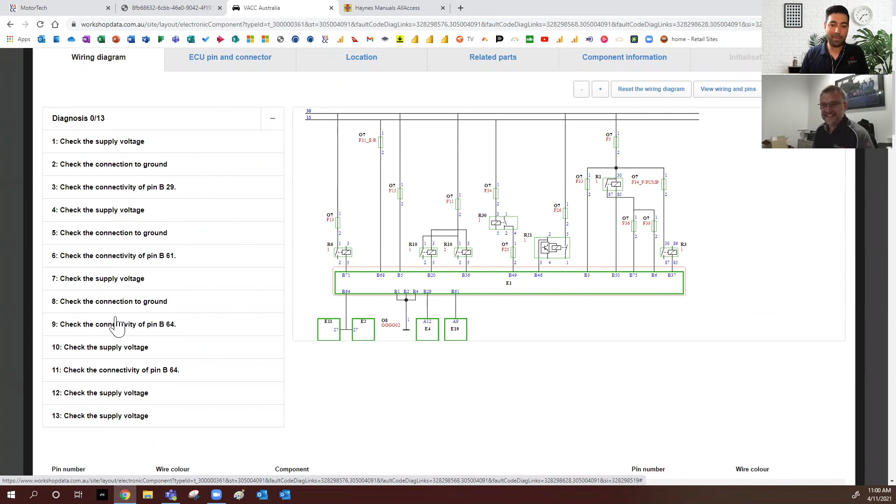Well, like I said, that Captiva that we did, it brought up quite simply from our pathways the TSB, and it was exactly the symptom, exactly the cause and correction. So we went through that and had it diagnosed and done in a very, very quick amount of time, much quicker than I probably would have done had I not had the information.

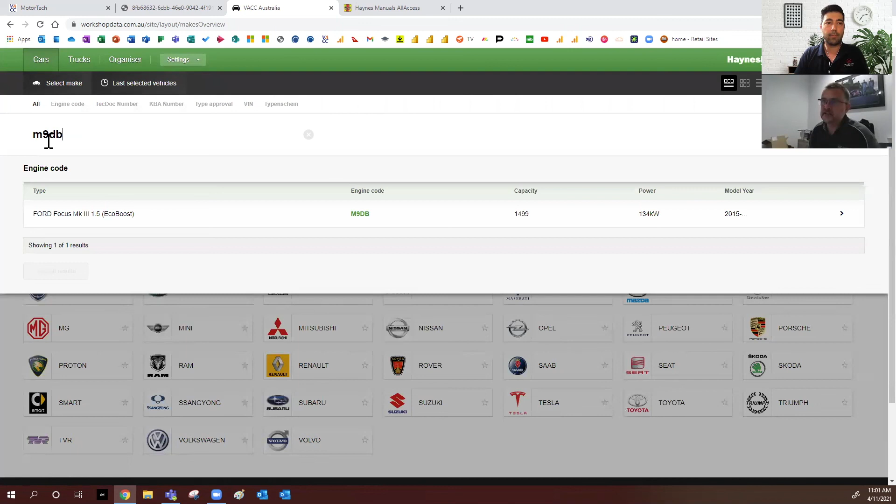Yeah, I just want to show another one, similar vein to that, and this is from a VACC member who asked me about it. So we actually went in here. M9DB was a Ford Focus, and what it had was a current draw on it. Battery kept going flat, so we came in here, and it was just a random question. So we navigated, found it here, and so excessive battery discharge.

I can't remember whether he had any fault codes or not, but the cause was the washer fluid leaking through the pump and then wicking its way up through the loom, to the BCM and rotting it out. That's incredible. Yeah, so as an auto elec, we would have been sitting there pulling fuses out trying to isolate where it is, but having that information, I just went and had a look at this, and I've just solved it. I've just saved myself hours of pulling the car apart for no good reason.

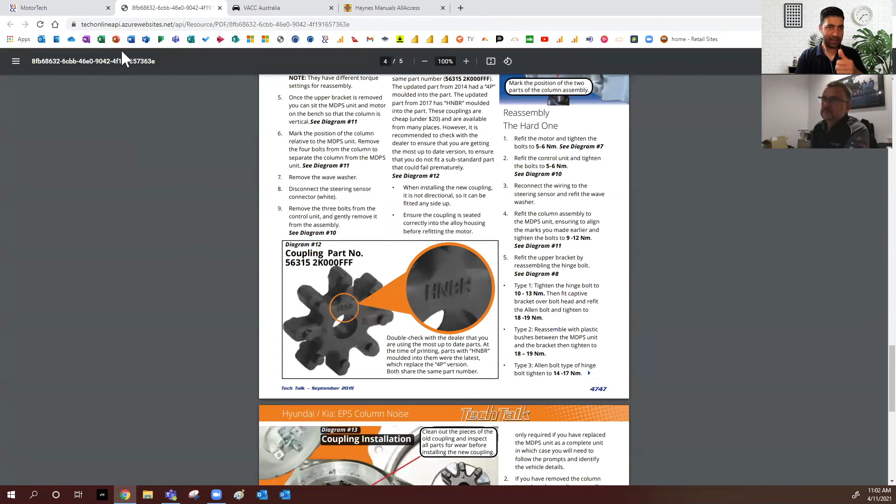Yeah, definitely information is key, I think, moving forward, and I think it's summed up pretty well with Motortech, because it seems to be all in one platform, which is really good. So definitely glad that you've run us through all of that. It looks pretty sort of complete. Like you said before, there's some things it may or may not do, but some online platforms may or may not do either, and this seems quite complete. So, mate, hats off to you guys. It looks really good.

At the end of the day, we're here. As I said, the tech advisory service, we're all qualified technicians. We're here to help. I think you can also think of us as that extra technician offsite from the workshop.